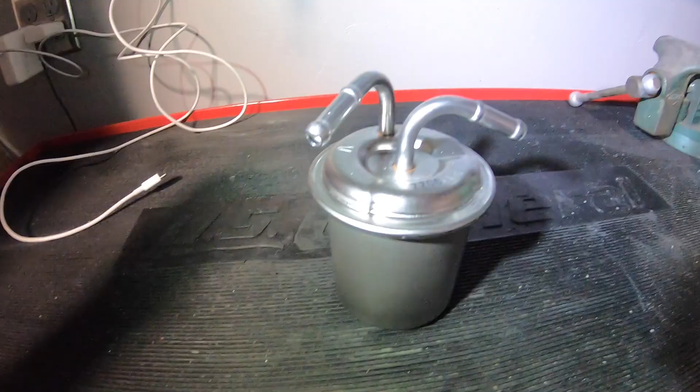So this is a new fuel filter, and the fuel goes in right here. It goes through the filter and then it comes out through here.

And let me show you where that fuel filter lives. So the fuel filter lives right here under the hood, and it's being held with a bracket. It just clips right here. You release it, and then it's a round bracket, and you release it.

And we're gonna pop out these hoses here. But the manual says to disconnect the connector to the fuel pump relay. And the fuel pump relay is under the glove compartment, and that sounds a little complicated to do.

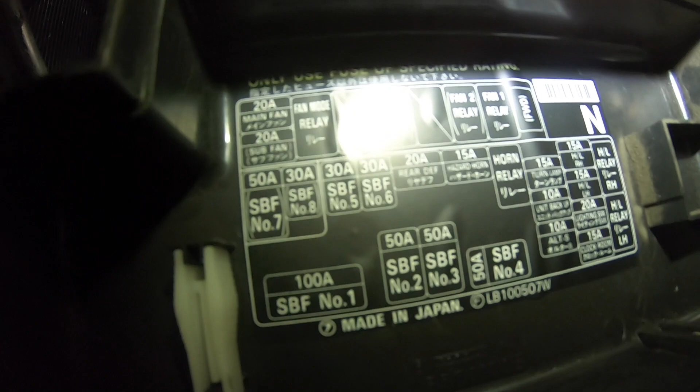So then I thought about the fuse, and I looked in here. I took the cover to the fuse box off, and I looked for the fuel pump fuse, and I couldn't find it. As you can see, it doesn't say fuel pump anywhere. That's all it says. Sorry about the lighting, but it doesn't say fuel pump there.

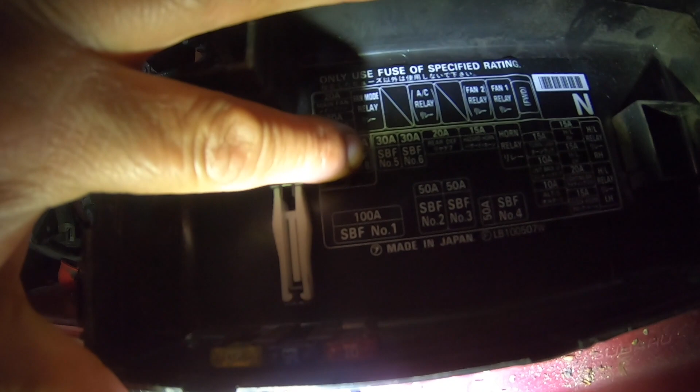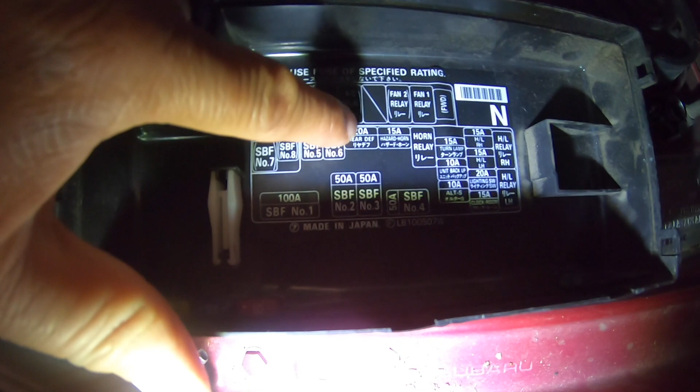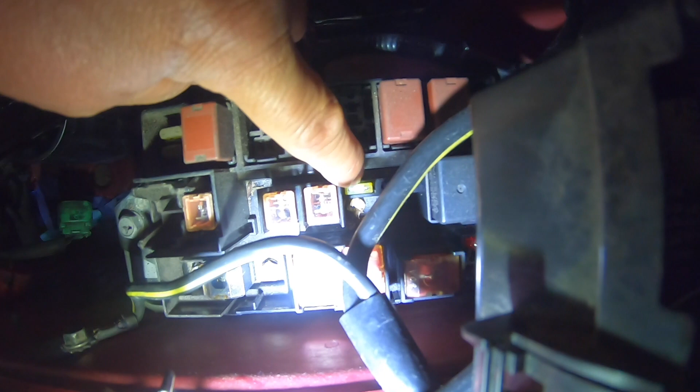So then I did a little research on the internet, and I found out that the relay was the SBF number 5, the 30 amp relay right here. This one right here. So that relay ended up being this one. There's a 50 amp, 30 amp, 30 and 30, then 20 and 15. So if you go backwards: 15, 20, 30, and the second 30 coming this way. So you have 15, 20, 30, 30, and it's this relay right here.

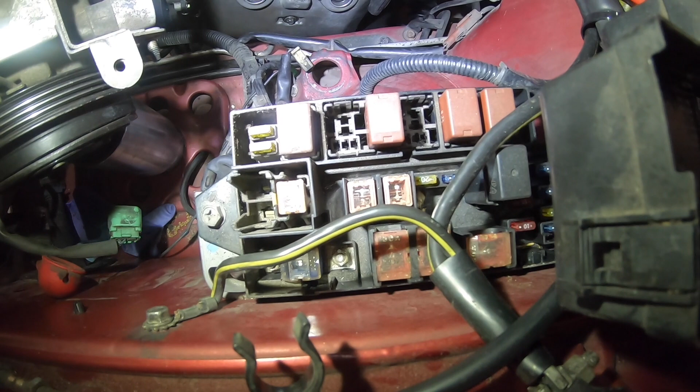So before I took it out, I did a little research to see why I was curious why the manual said to pull the connector from the relay, which is under or behind the glove compartment. So this is what I found.

So I did a little bit more research on the fuse for the fuel pump, and thought it would be easier to just disconnect or just pull the fuse. So I entered the year of the car, Subaru Forester fuel pump fuse. So I went in there.

And then what I did is I went here, checked it out, didn't get any information there, and I just kept searching until I got to this one, North American Subaru Impreza Owners Club. You'll find a lot of forums for your particular car on the internet.

And so then what I did is I clicked on that. So it took me to the site. And then I went down, and there was a question here. It read: just wondering what the fuse number is for the fuel pump. Can you guys see that? Let me see, it's right there. Just wondering what the fuse number is for the fuel pump.

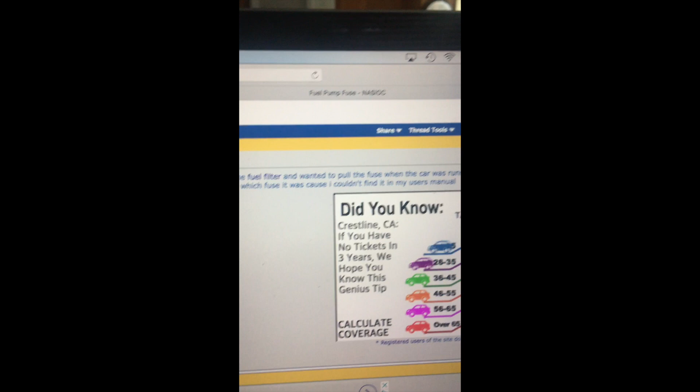I want to change the fuel filter and wanted to pull the fuse when the car was running to let the fuel pump depressurize, then turn the car off so I don't leak. Just want to know what fuse it was. Okay, so anyway, you couldn't find it in the manual.

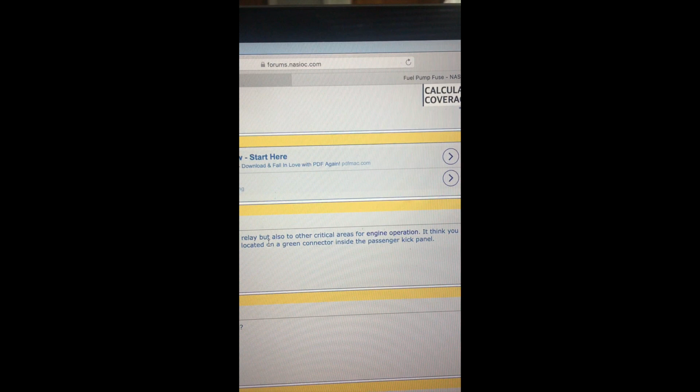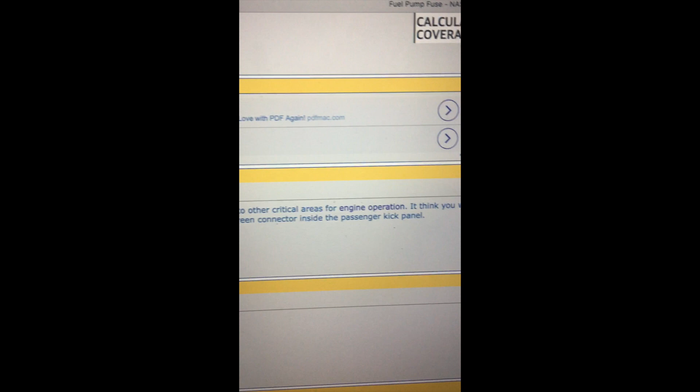So then you go down and you get an answer, and it says here: fuses. There's 2 fuses according to this answer. It says fuses SBF 5 and fuse 11 supply power to the relay, but also to other critical areas for engine operation. I think you will have to pull the relay for the fuel pump to do what you want. It might be located on a green connector inside the passenger kick panel. So there's the fuse, which is SBF 5 and fuse 11, but it's for other critical engine operations, so it's better to pull the relay instead of the fuse.

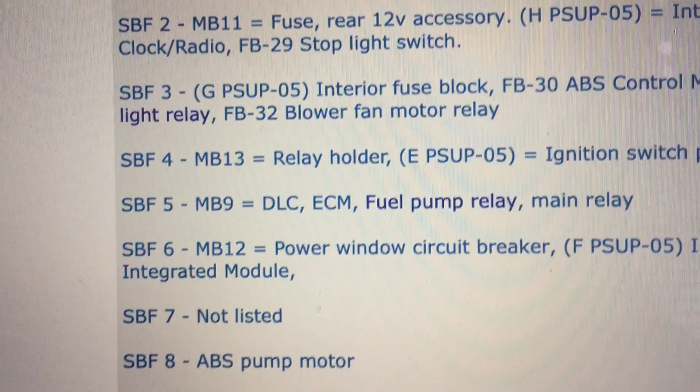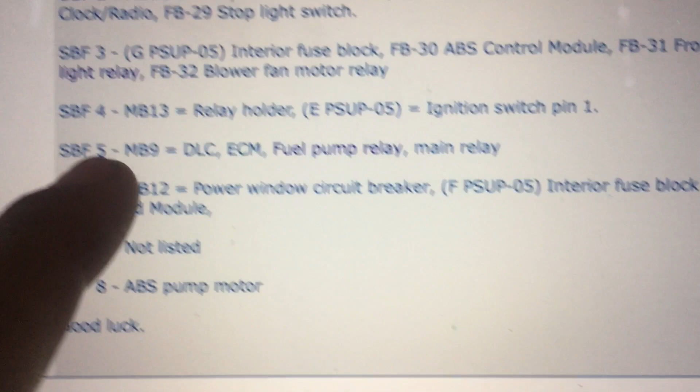SBF 5, description. So the reason it wouldn't be a good idea to pull the fuse is because that fuse supplies a lot of things here. Let me show you, where's my finger? Right there. The SBF 5 link connector protects the computer, the ECM, the fuel pump relay, and the main relay. So if you took that fuse out, all these things wouldn't work.

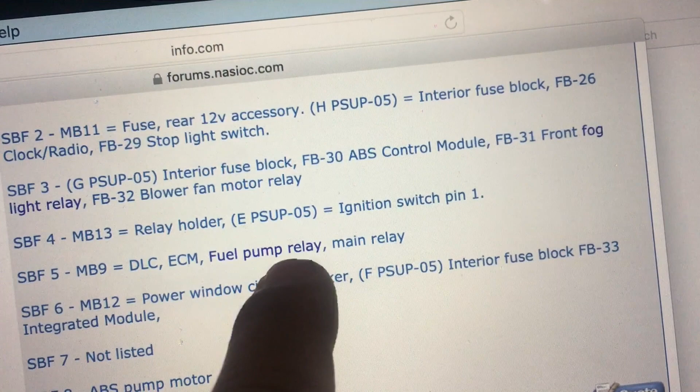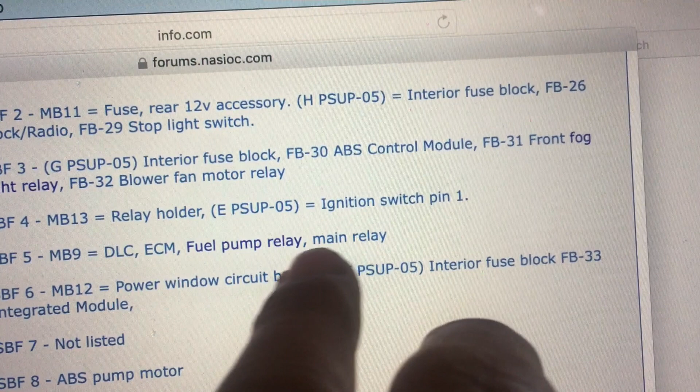And all you want to disconnect is the fuel pump relay, or the fuel pump. So we need to get to the relay. Don't be pulling fuses when they cover all these other things, because then what's going to happen is we're going to pull the relay, then start the car.

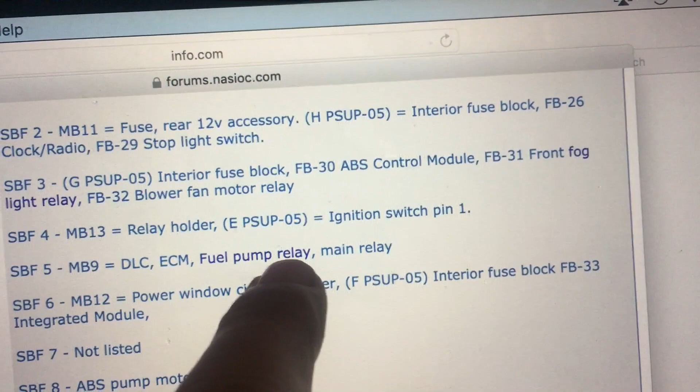It's going to start for a while until all the gas is out, and then it's going to stop, and then you're going to crank it about 5 more times, which is what the manual says. And so you're depressurizing it. I've also seen that people leave the car overnight, and when the car is cold, the pressure decreases, and then you can work on it.

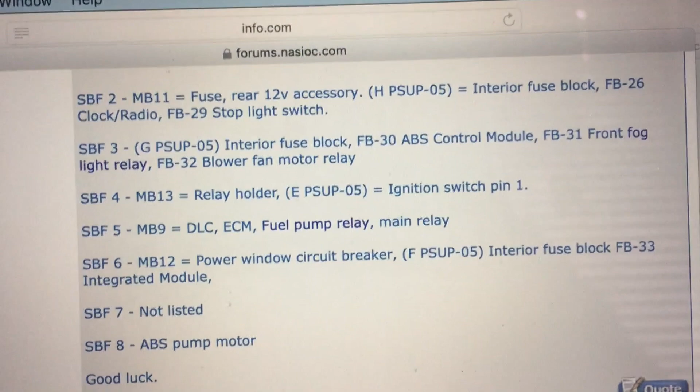You don't have as much pressure when it's cold. But I would rather just get to the relay, disconnect it, and just run it until it stops, and then crank it like 5 more times, and then you're pretty sure the pressure is gone, so you don't get gas on you or in your eye. And wear safety glasses - that's very important.

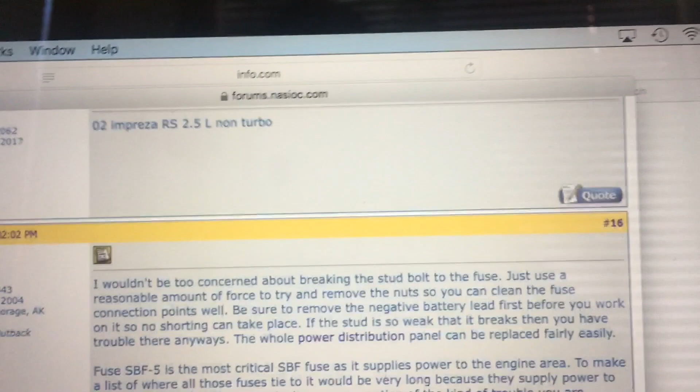I found this on one of the forums, my forum, the NASIOC. It's just research, going through it, and I wanted to know why I couldn't pull that fuse. So I found out.

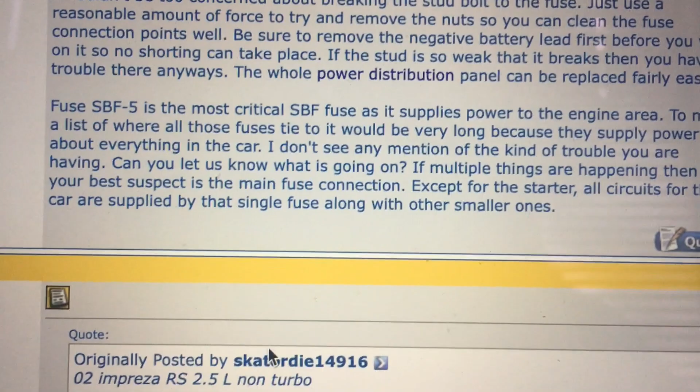Wow, there's a lot of stuff you can learn here. It says SBF 5 is the most critical SBF fuse as it supplies power to the engine area. To make a list of everything these fuses are tied to would be very long because they supply power to about everything in the car.

So that's why you can't pull it. Okay guys, let's get to the relay. So here we are in the passenger kick panel, or the glove compartment area, and I'm going to show you where all the screws are. Let me get the light directed.

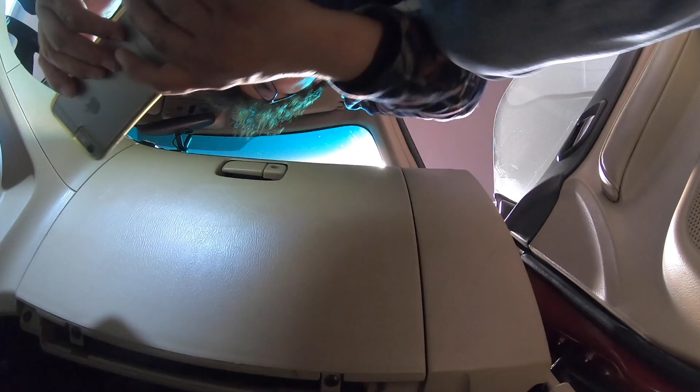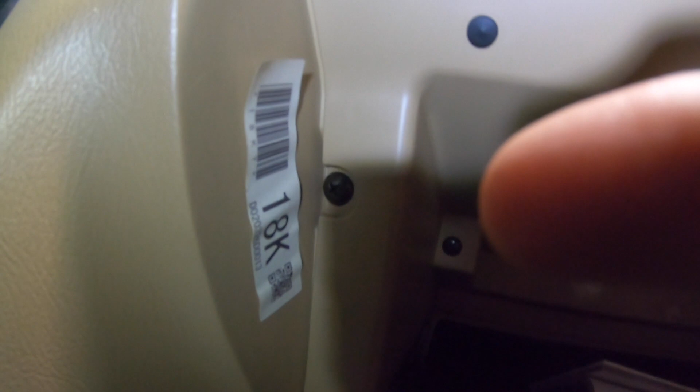So what do we have down here? So we have 1, 2, 3, 4 down here - we have 4. Then you open the glove compartment, and then you have 5, 6, up here 7, 8, 9, 10, 11, and 12, and 13 - I think there's 13.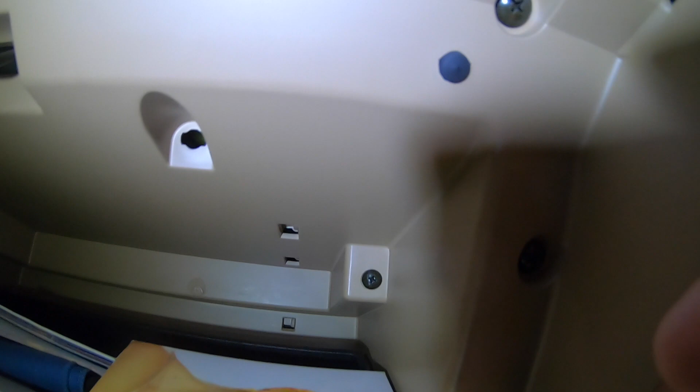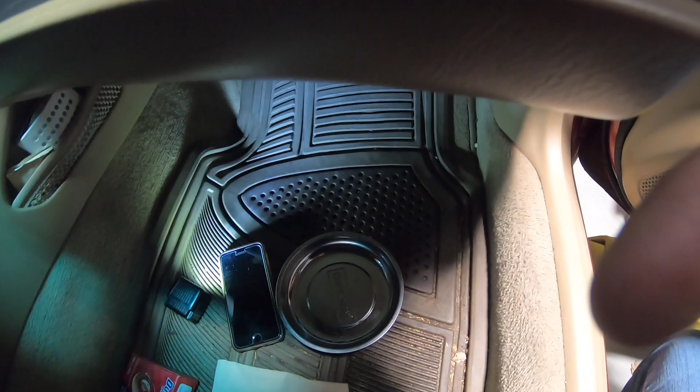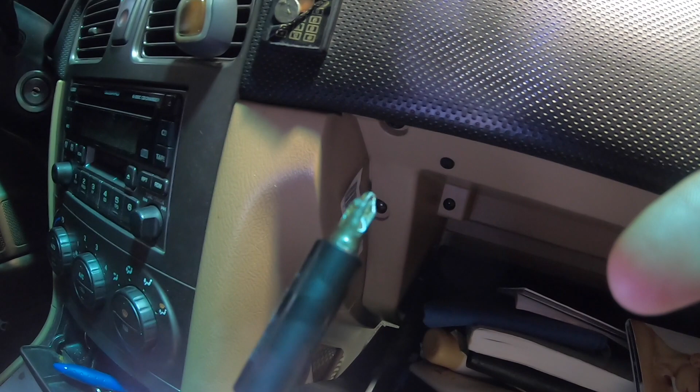Okay, so let's take them out, and we're going to put them in this little dish so we don't lose them. Turn this to the left - that's right, turning it to the right, we're going to loosen it to the left. So there's one.

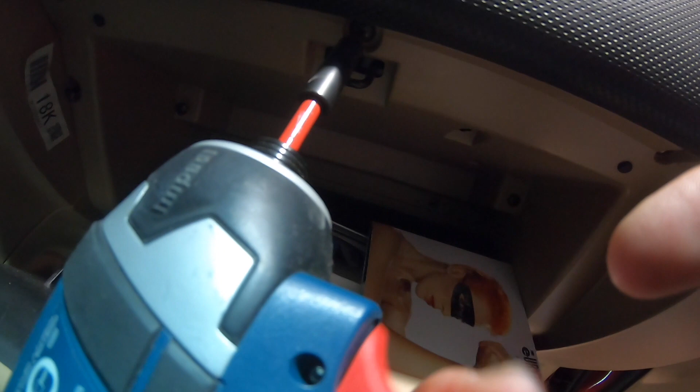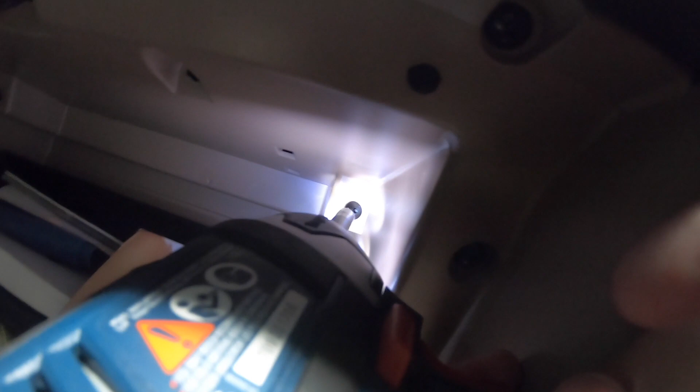I'm glad I have a light on this drill. And then you have another one here. And you have another one here. No, not there - here. Oop, it fell in there. Oh, there it is.

I can already hear the coyotes. The sun has gone down here - I'm going to put it here. But I can still watch the sun go down on the mountains there. The mountains are so gorgeous.

It's so nice. Oh, that one stuck to the screwdriver. This one fell through, and then you got this one. And then you have this one. Then you have this one. I don't think I undid this one.

And then we close it, and then we're going to get these under here. Let's see.

All the stars, if you look out in the sky, is a firework display like you see on the 4th of July, which is a great occasion for celebration. The universe is a celebration. This is a firework show. Celebrate that existence is.

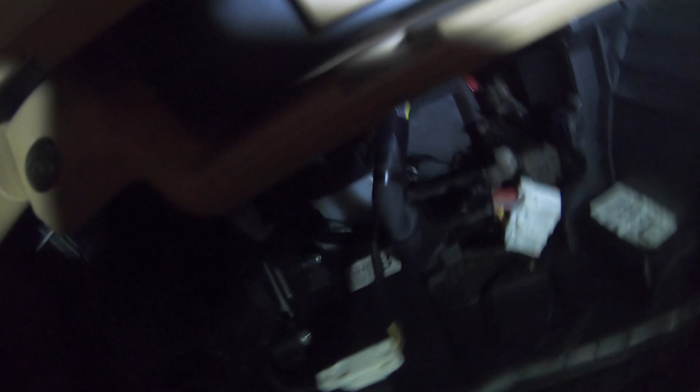Wow, are we still going here? Yeah, okay. So we have one here. We have that one. And we have another one over here. Where is it? Let's see.

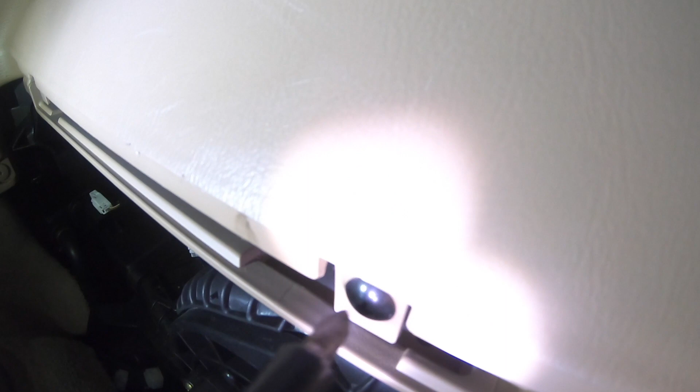And upside down here, so okay, it's stuck to the drill, which is good - you don't lose it. And then you got this one here. Just hold on to this. Where'd it go? And then this one here.

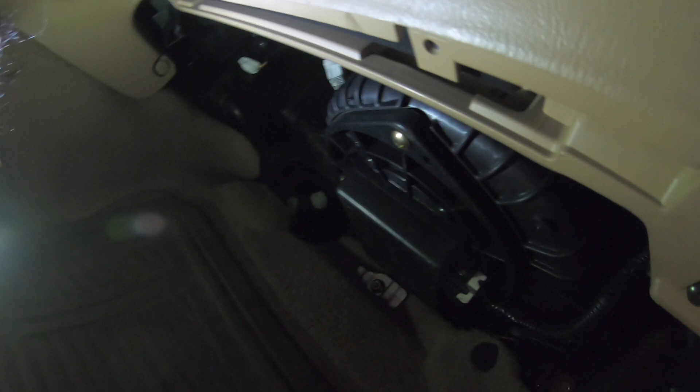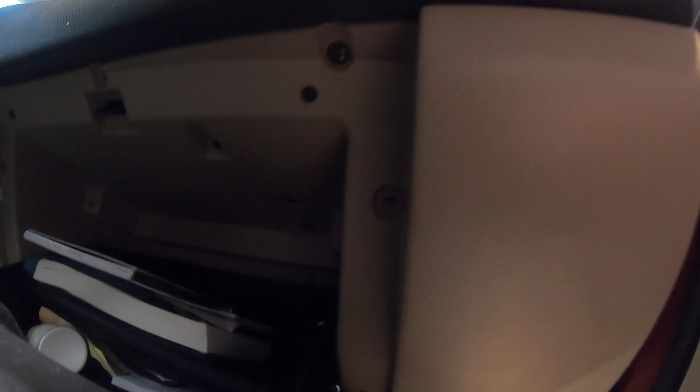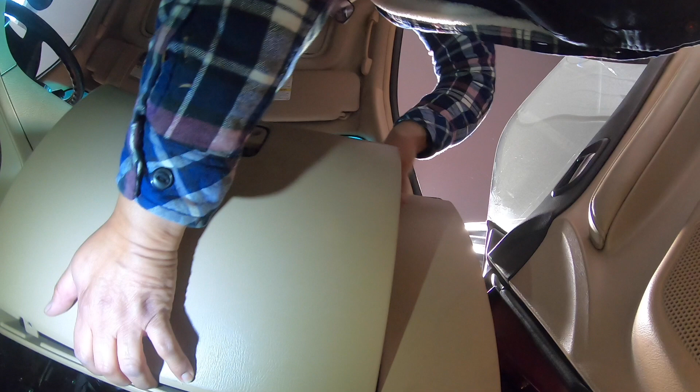I hope you guys can see this. I know you don't have to see this, but I just want you guys to see what I'm doing. And then, unless I'm missing a screw, which I am - I'm missing it right here. I'm going to see no screw.

So there we go. Remove the compartment. And you also have your cabin filter in here - I've never changed mine, so I'm going to show you what it looks like. So there's the two connectors. I think it said it was the blue one.

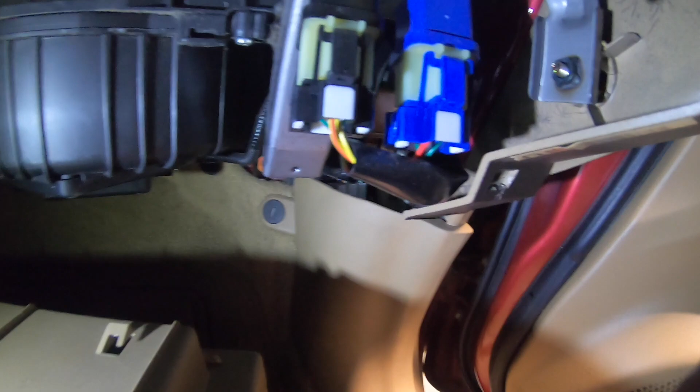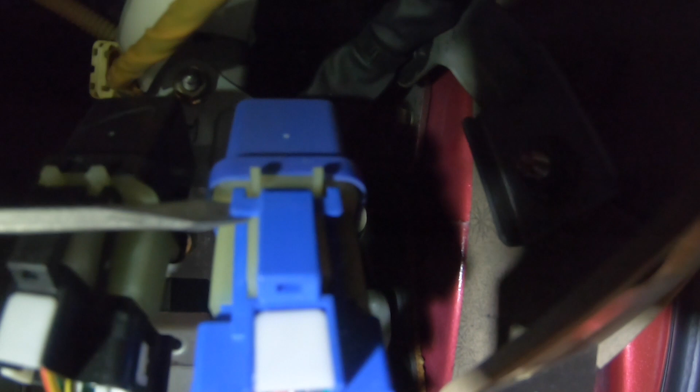So all you do is disconnect this connector, the blue connector. Okay, so here we are, got a screwdriver, and I think this goes forward. Watch you break it. I think it just... well, ow. Let me see.

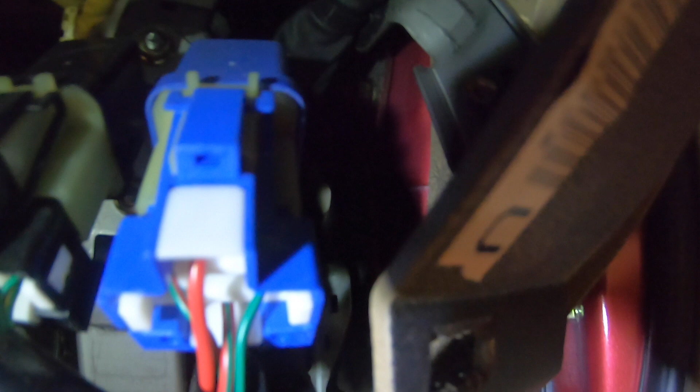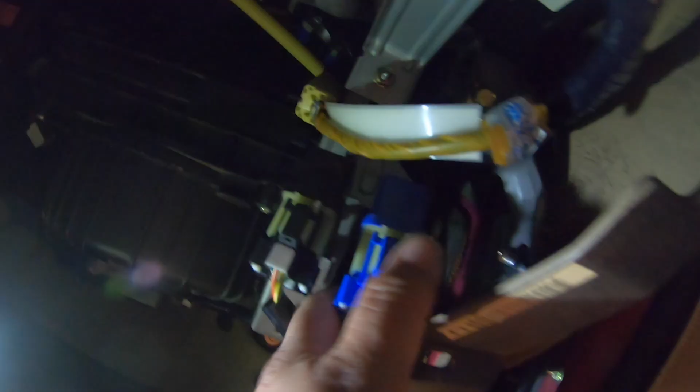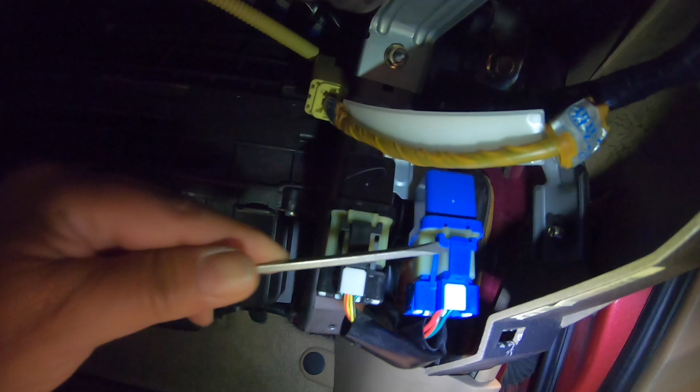Let's see - am I supposed to squeeze on both sides? This side. So we gotta figure this out. Okay, so it's not that. And it looks like it's just the blue part. So I'm gonna hold the light and the camera in one hand and try to push this down. Like I said, watch me break it.

It looks like this blue part just slips down, but sometimes something has to get released, and I think it's this thing. Let me turn off the camera for a second, let me see if I can get it. So I got it - it was just about pulling this thing forward, without breaking it, because it has like a little clip right there, and that's where it locks into it, like that. So somehow you pull this forward, and it was kind of tight - you just work on it little by little. I don't want to break it.

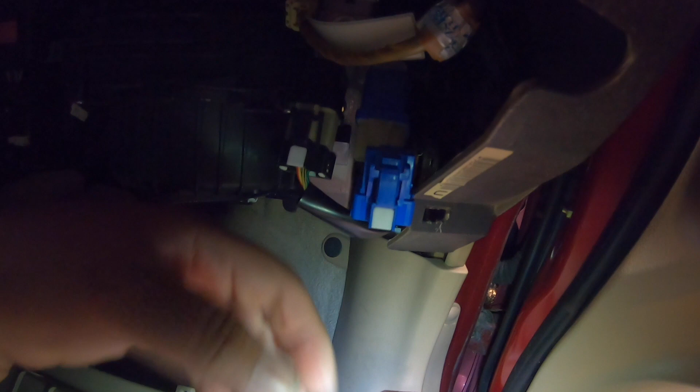So you disconnect the fuel pump relay here, and then what you do is start the car and let it run until it dies, then run it 5 more times. 1, it dies. 2, it dies. 3, it dies. 4, and finally 5. Hopefully that'll relieve all your pressure, and then you can change the fuel filter.

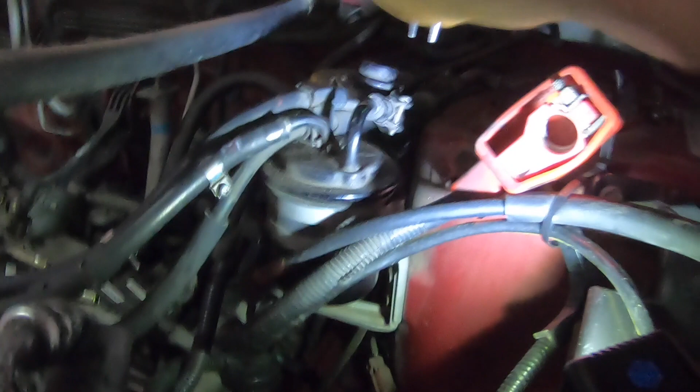So we're going to twist it, and we're going to push it. Hopefully it'll come off easy. I guess I can spray some WD-40.

We'll grab it right here, we'll twist it. Oh, it's a little better. Just keep twisting, be patient. You don't have to manhandle it.

Or, I don't know, there's a better word for that. Okay, maybe woman handle it. Jeez, it's a little tight now. Now I'm pushing, and it's starting to come off. You can see it from here. Can you see that? Oh yeah, right there. I'm gonna put it right here. Maybe you couldn't see what I was doing over there.

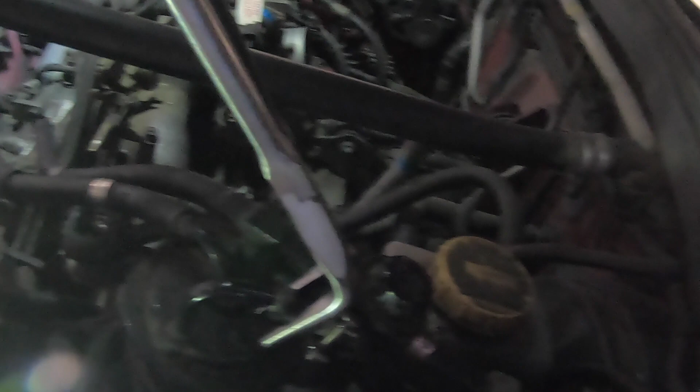So let's keep grabbing it, and you don't want to damage the hose. You just want to work it off. How long is that dumb tube? It's that long, brother.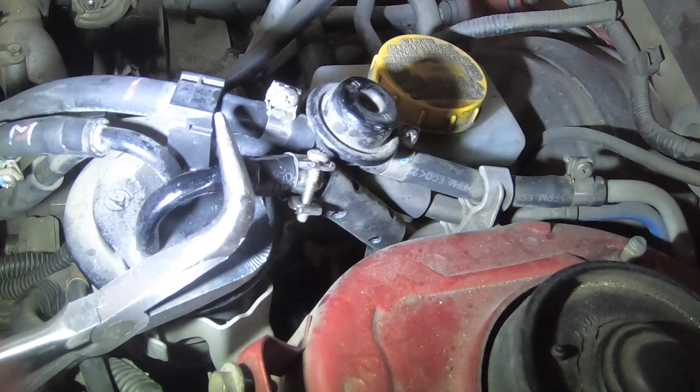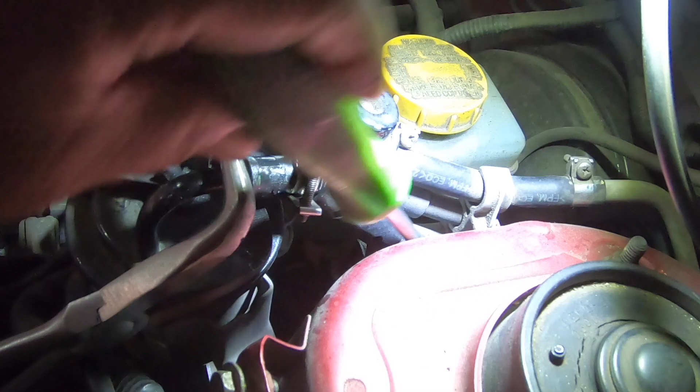Let me see something. Okay. Maybe it's... get a screwdriver. It's on this plastic bracket. There.

So maybe now it'll be a little easier. Put the light right here. Let me see. All right, here we go. Yeah, it's not that easy. You really gotta... let me put some WD-40 in that one. Let me try it. Let me try this one.

So you twist it. It's a little tough, so you do have to use a little strength.

Trying to take it off or put it on? Yeah. Hi, hi, oh I'm sorry. That's okay. Oh, there you go. Just don't grab onto the pipe, okay?

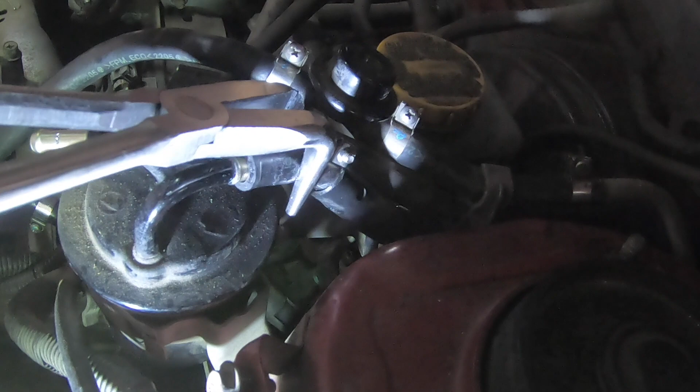So run this clamp all the way down, and then I want to twist it. Make sure this is twisting, and it is. And then I'm gonna grab it on this side. So there.

Okay, so we've taken off the hoses. Let me take all this, and then... what's over here?

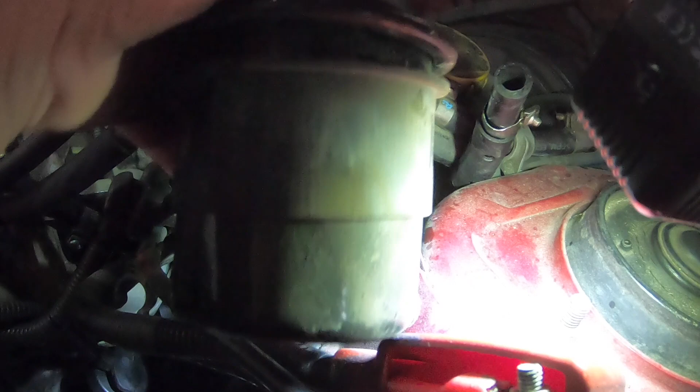So if you remember, it was like this, the arrow was facing this way. Okay, and then so you just take it out. Oops. And it has like a little rubber gasket, so you want to reuse it.

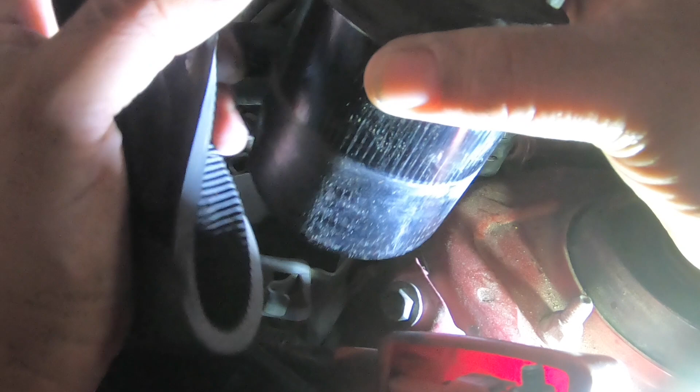Okay, check that out, we can pour a little fuel out and see how the fuel looked. And so let's get the other filter and put it on there. Put that aside, and then we'll get the other filter, the brand new filter.

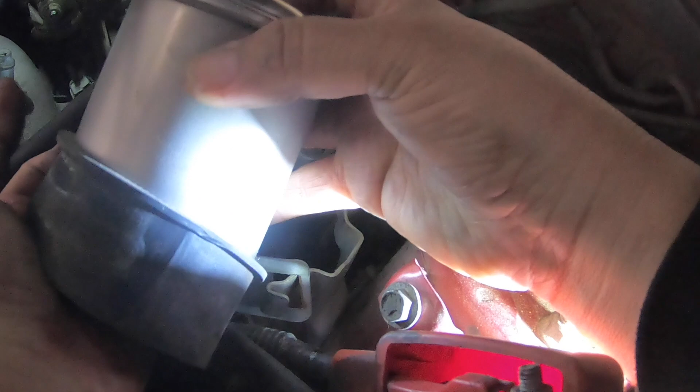And then we're going to slip the gasket on. And so this arrow is right here, and it's facing towards me.

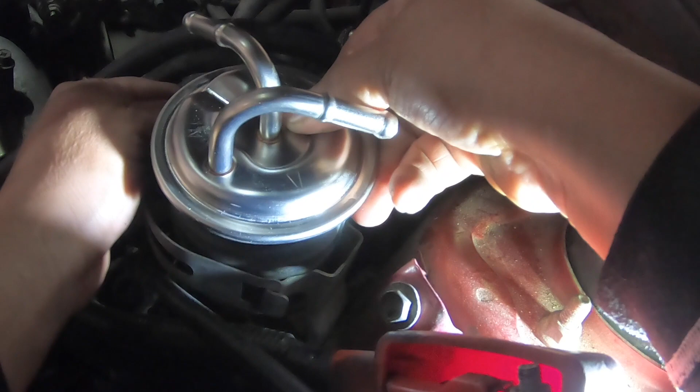Let's see, I guess you want to make sure the bracket goes around that gasket. Oh okay, there it is. Okay, so you push it down and you put it around the gasket, like that.

And you don't want the gasket to get caught over here, so make sure it's in there right, and twist it. So that feels, I'm happy with it. And then you pull this forward and it clips on like that.

And then, too much light, sorry. And then here, I think I'm gonna put some WD-40. And then I'm gonna put this on.

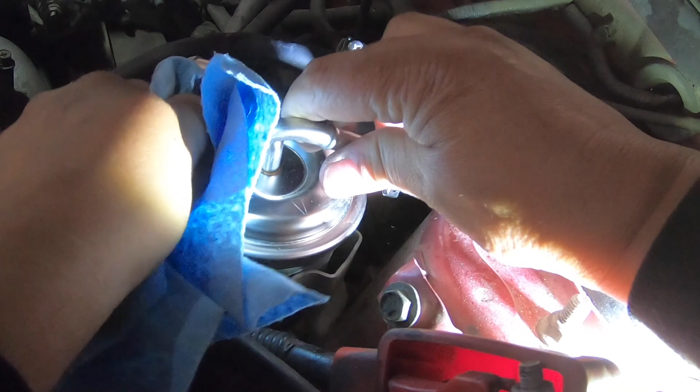You can still turn it a little bit. And I think that'll work. I put a little WD-40 right there. And then here's the hose.

Burgers are ready if you want. Okay, thank you.

And this one goes all the way on the second bump there. See?

We're going to loosen this a little bit, and then we're going to walk it over here, and then we're going to tighten it. And that's good. I like how you make sure it doesn't turn, and that's how you know you have it tight.

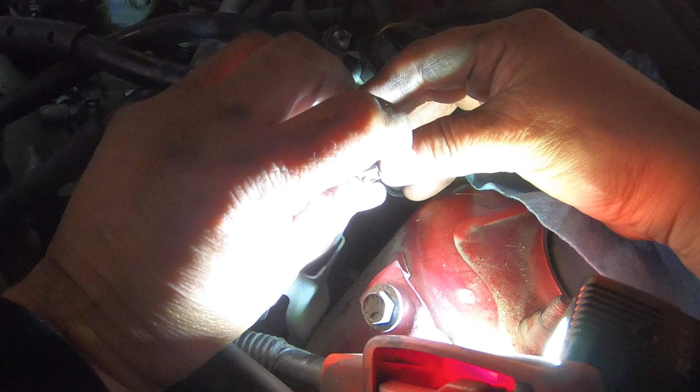It came off, so I wasn't able to tighten it. I think it goes the other way. Now turn it this way so it falls, I can catch it. So I think it goes this way.

You just have to be very patient, because if you're not... oh, I see. Okay, let me take it off.

Okay, so it needs to go in here. So pull out the screw, and then this is going to slide in here like this, and then you put the screw in through here, like that. Now it's not going to fall, and now you can tighten it.

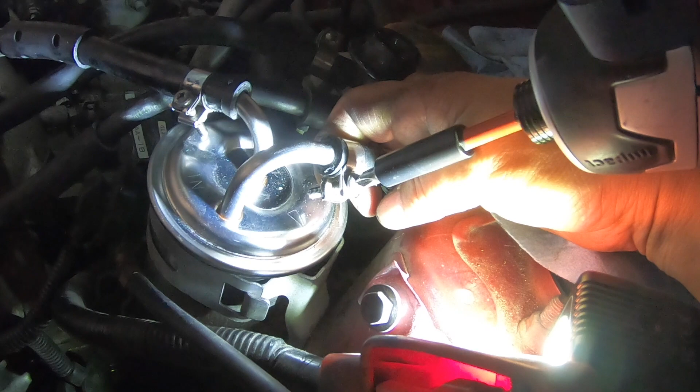It kind of worked, it's so weird. I guess as long as this is tight. Yeah, that's not gonna come out.

Yeah, okay, that's it. That's how you install a fuel filter. Sorry it took so long. See you guys next time.